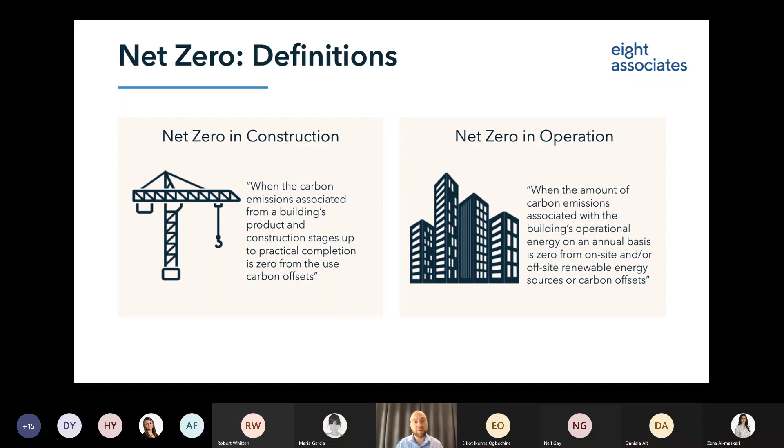So the key thing is net zero is really about the, as you would infer from the name, the net piece. The reality is that at this point in time, we can't build a zero carbon building. We can't operate a zero carbon building. So we do as much as we can—we reduce it as much as we possibly can, and then we would have to purchase something like a carbon offset, where we basically commission a planting scheme or some kind of artificial environmental restoration project, which then sequesters carbon, captures it, usually in the form of tree biomass, and then we either credit or debit that depending on the amount, and we get down to that zero where we've expelled carbon into the production and use of the materials, but then we brought it back down in theory through the planting of trees.

So it's very useful to think about what we call system boundaries. If you're used to the discipline of sustainability, everything about sustainability is about the boundary, and you can think of this as to where we draw our remit. Where do we draw the extent of our system? What are we looking at? In many respects, many of the failings of sustainability and many of the perverse incentives or poor decisions we can make in and around environment and sustainability are because we haven't drawn an appropriate boundary for the application or context.

So one example of this—I mentioned before about getting beyond just looking at carbon. Carbon's important, but it's also one piece of the sustainability puzzle. So boundary issues often exist when we have a laser-like focus on carbon and we forget things like land use change, impact on biodiversity, water consumption, pollution. In reality, we need to weigh all of these things up, and that's the purpose of having a well-defined and clear boundary, knowing what to include and what not to include effectively.

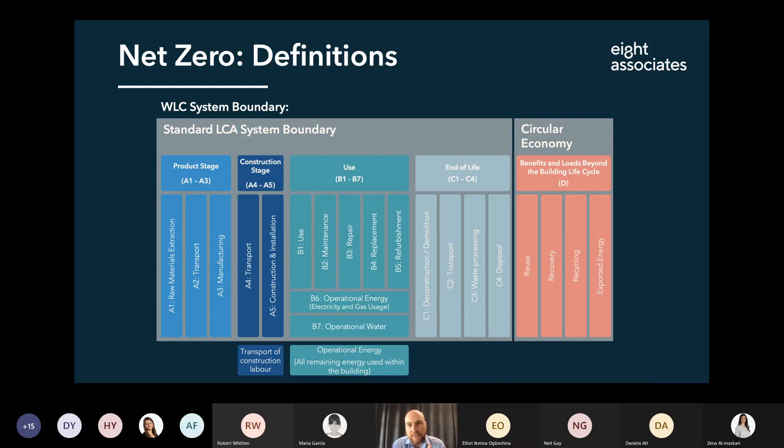It's a shame. There's a lot of LinkedIn and social media buzz and excitement about it, but in reality, this actually happens where life cycle assessment and material specification is put front and foremost in NBS specifications, at the absolute heart of architectural design. It shouldn't just be delegated to saying the client didn't really want it, or didn't express an interest, or didn't have budget. I appreciate the difficulties of being a client-led discipline, a client-led sector - that's how we do what we do - but it's our job to push this back onto the agenda and make those decisions everywhere we can, complementing the sustainability and carbon footprint of our buildings.

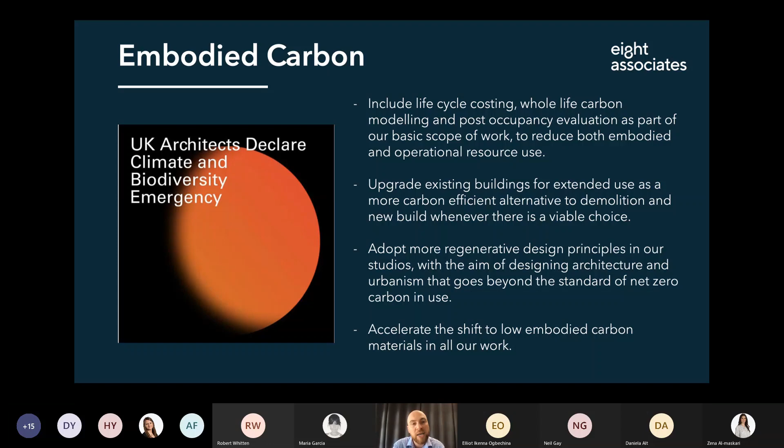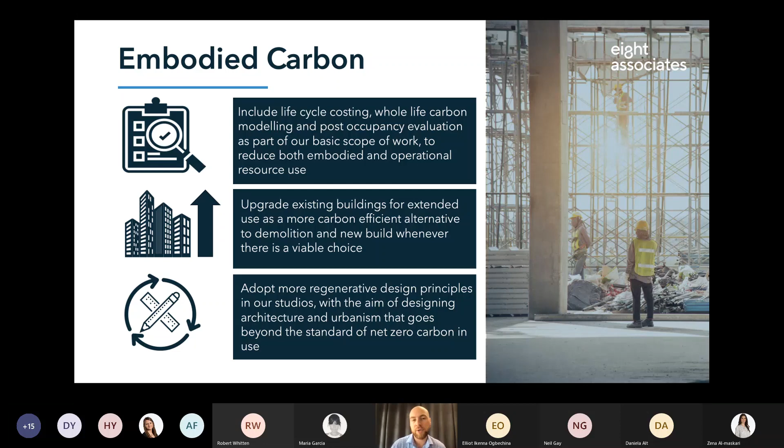So these are the key areas that relate to embodied carbon. It's pretty important that we look at whole life carbon, but we also need a lot of focus on the existing building stock, which we'll come on to shortly - this is really a key part of the challenge. New build and material specification for new build is very important, however a lot of attention needs to be focused on existing buildings, because about 80% of the building stock we have at the moment will still be in use and operating in 2050, when we're supposed to have achieved our net zero goal.

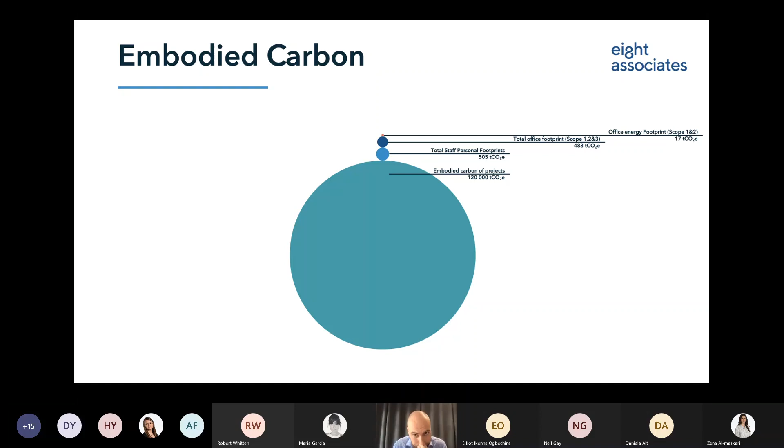So this is a very pessimistic or maybe realistic rule of thumb that we've taken from our years of working on life cycle assessment of buildings. We believe that we can usually achieve about a 13% reduction. This is taken from the few hundred projects we've worked on in life cycle assessment for the last couple of years. On average, this is the typical reduction that we were able to achieve through optimization of concrete specification, optimization of design, layout, whatever it might be. This is what we can usually achieve.

And then the key thing to recognize, I think, is what if we could do that on all of your projects through careful engagement, careful specification, careful design. The impact on the environment is orders of magnitude more than it would be if you went to become a completely carbon neutral office and completely neutralized all of the impacts of your employees.

It's not to say we shouldn't do those things. Those things are really important from the environmental perspective, because obviously many small contributions make a big contribution, and also it's really important that we spread that literacy and have that behavior change within our industry. But we've got to keep an eye on the ball, and the key thing here is the influence that we can have on our projects through minor modifications or minor enhancements can have huge benefits

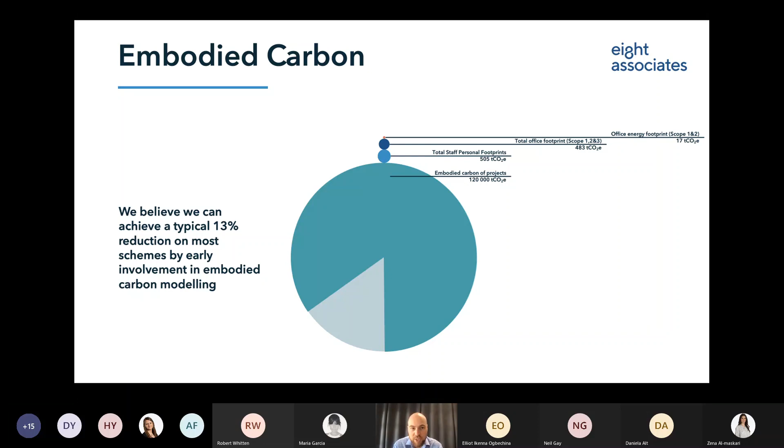when we look at the impact of buildings, because it's important to recognize that an absolutely phenomenal amount of carbon and resources is dedicated to the built environment. If you look at the construction, the maintenance, the operation, and just having an urban and built environment, it consumes somewhere between 40 and 50% of the world's resources per annum. So this is a huge amount of where our footprint lies, and it's important to recognize that small changes in a big system can have very high value benefits.

So we're going to look at two areas, which are the two areas of net zero, which is embodied, obviously, and then the operational. We've got a few slides on each, and it's probably worth digging into them, and I just want to highlight some of the trends and some of the things that I think we really should know and recognize.

So this very useful rating system or data set comes from LETI, which many of you are probably aware of. It's a really great consortium of like-minded companies that want to contribute and share data, and they've come up with this banding because a lot of the problem we have with calculating embodied carbon is many clients, many practices still don't really know what's good, what's bad, and the reality is that we have very poor data quality.

The data is very far from what we need in order to make informed and intelligent decisions. So we often end up using a lot of generic carbon factors for materials and products, which is the best we have right now, but we need to very quickly move away from that.

But this is where, once you bring together your carbon footprint for your building, you put that into the metric of kilograms of carbon equivalent. It's equivalent because it captures all of the greenhouse gases, methane, sulfur dioxide, whatever it might be, these other gases and pollutants which have an impact on the greenhouse effect. We put it all into a coefficient, or rather a CO2 factor, and then we roll it all into one. That's why it's CO2 equivalent.

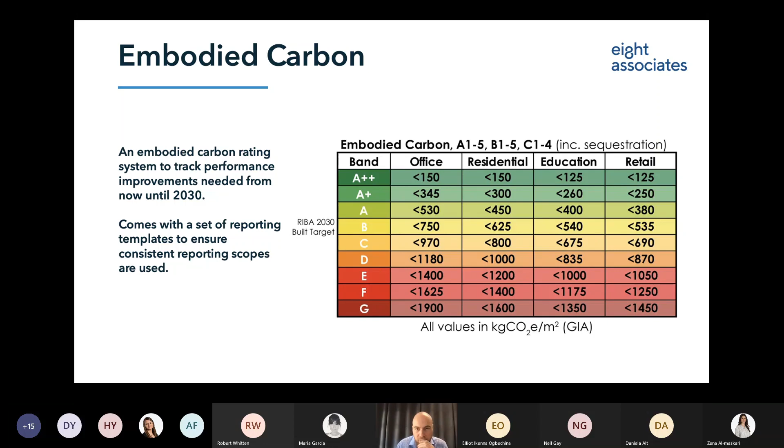So just familiarize yourself with that slide for a moment.

So embodied carbon is really important, obviously, in new build, because all these materials are being assembled. And if you look at the rough pie chart of the split between embodied and operational carbon for a low carbon or well designed building, say BREEAM Excellent and above, or Passive House, or a whole range of different high performance or low carbon buildings in operation, you'll probably find that the split between embodied carbon and operational carbon when the building goes into use is about 50-50. It depends on the use class, but it can be more either way. So that just highlights the importance of embodied carbon.

That's why we need to put this emphasis on the reuse and retrofit of existing structures, and we talk about this a lot, and we have a few headwinds against us. The VAT difference that we have between refurb and new build is not very helpful, and we know the government did that to spur on more new build, particularly new build homes. But what actually happens is it creates a bit of a disincentive. So we have many developers that come to us and say, we specifically are aiming to demolish this building so we can get a VAT benefit, which is running very much counter to our aspirations here.

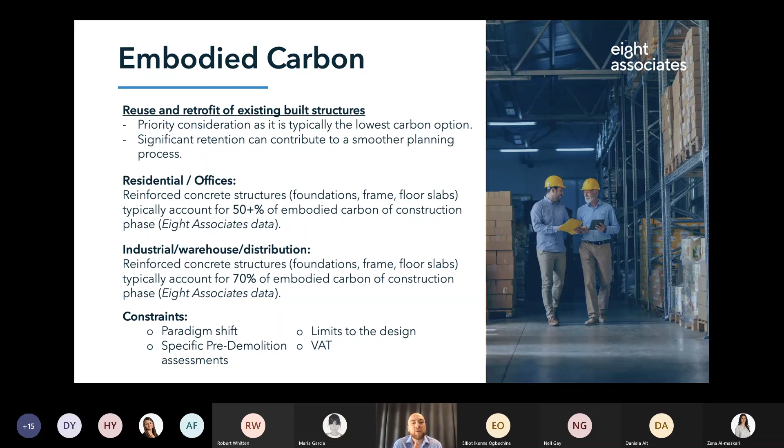However, broadly speaking, with the exception of heritage assets and listed buildings, I'm yet to see a building that can't be repurposed and reused and still achieve a comparable, all things considered, performance which is roughly in the same ballpark as a Part L compliant building. Obviously, the real constraints are turning circles, spacing, layouts, column layouts, anything like that. The real practical aspects of ergonomics where the building might fall down. But purely speaking, from an environmental, sustainability, and energy and carbon emissions perspective, reuse and retrofit is 9.9 times out of 10 better.

So this is an example, just to get a feel for this, of quite a big building in central London that we were working on, and there was basically a lot of retained but a lot of new, and we're adding stories onto this building.

You can just see here the actual benefits. So this was our baseline here if the building was new build, best practice 2020, best practice 2030, and what we actually achieved. And you can see here it's a phenomenal reduction from reusing approximately 50% of the structure and the different aspects.

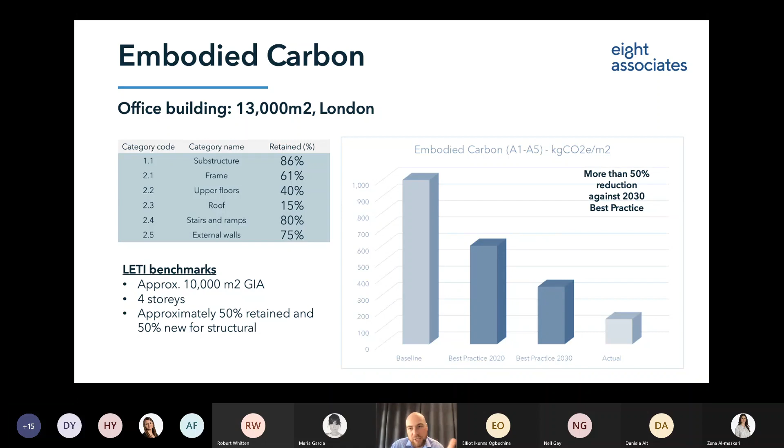We were able to maintain a hell of a lot of the frame and the external walls, which is fantastic. The roof we lost, and then upper floors needed a lot of repurposing, so we lost that. But by and large, you can see that having such a large amount of retained facade completely changes the performance, and this is why it's so important.

So I will just let you read this for a moment. You can see these are some pointers and rules of thumb for yourselves to familiarize yourselves with as to the general benefits of embodied carbon or low carbon specifications.

So the first two are really concrete, or rather cement replacement. So you can see we have GGBS and PFA, and these are basically byproducts from the industrial process, which can be added as alternatives to cement in concrete mixes, and quite substantial.

As you may remember from the previous slide, the structural frame is a huge amount of the overall embodied carbon. So this is really your first port of call: look at concrete mixes, look at structural steel, because these are where probably the biggest ticket items are going to be achieved.

You can see plasterboard, so British Gypsum, for example, are very good. Obviously, they're the industry standard really for plasterboards, but you can see they're working very hard to improve the sustainability of their products, and they have something in the form of an EPD.

So an EPD is an environmental product declaration, and this is really the gold standard of environmental declaration. So if you want to go and find what the environmental impacts are of a product, if it has an EPD, by and large, it should be pretty clear in there.

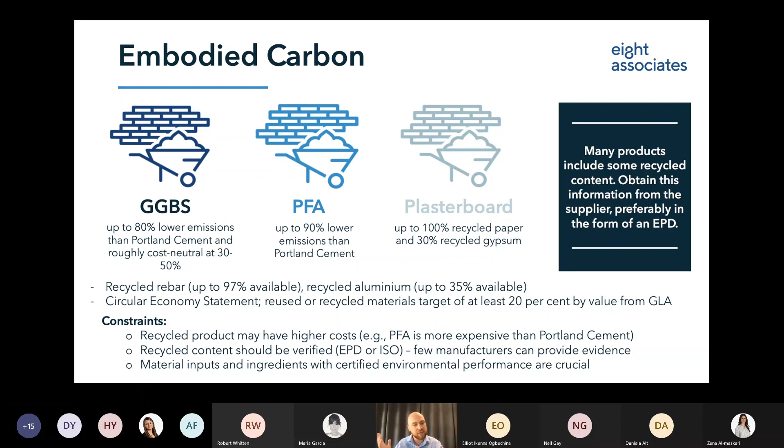So the problem is data proliferation. We do not have good data, and that's why we use a lot of generic data, and that adds a huge amount of uncertainty in our life cycle assessment studies, and that's something we'll come on to later on. So obviously some good rules of thumb here, which you as designers will all be aware of.

Something to mention on timber: we get to count timber as being negative in carbon terms, because it's obviously sequestered carbon from the atmosphere and has locked it into wood, and then we bring it into the building. Great, that's a negative.

However, how things are changing at the moment is that you've got all these forestry commissions, and all these trees are being grown in other parts of the country or other countries, and there's a real question mark as to, as we place more emphasis on carbon sequestration, does the seller and the grower of that timber want to give that carbon credit away? Do they want to keep it themselves?

Essentially, I think in the next year or two there's going to be a lot of fighting over this to work out who gets to keep that carbon credit, because obviously the grower, the supplier, the installer, the building, they can't all keep the carbon credit for their benefit, and there's going to be a bit of a battle as to who gets to count it.

So in theory, when it's sourced properly and you get to credit it, it's a great addition, but that might not be the case, and I think there's a lot of battles going on at the moment as to who's going to actually credit it.

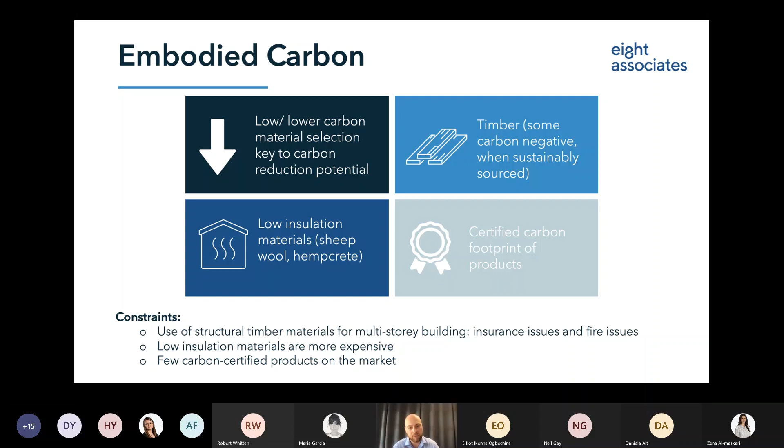One of the key things which is very important to consider, and a really important part of embodied carbon and building design, is life expectancy. The key thing here is not to just say materials that last a long time are better, because it's more nuanced and sophisticated than that. It's all about matching the anticipated life expectancy with the durability and life expectancy of the given product.

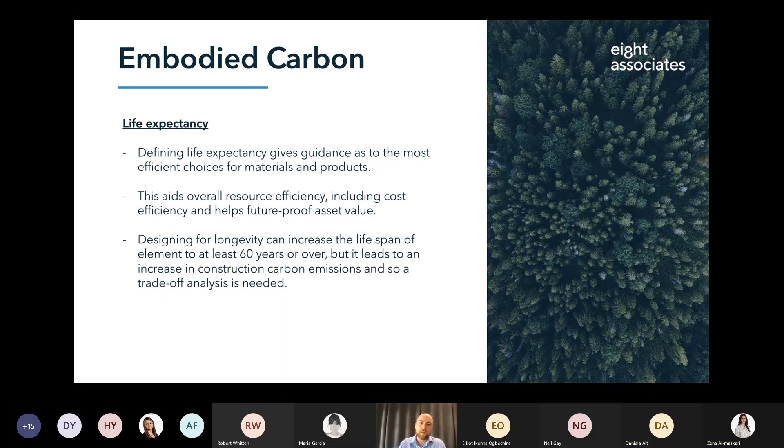For example, we have a lot of challenges with retail clients, commercial clients, but particularly retail, who will do retail fit-outs in a mall or a little outlet store somewhere. Particularly luxury brands specify incredibly high carbon, very beautiful materials—brass, marble, etc.—whatever it might be, and then it's going to get taken out in 5, 6, 7 years time because the concept changes, the aesthetic needs to change. All these materials which have a technical lifespan of 60, 100, 200 years potentially are getting ruined and not being used to their fullest effect.

So I think it's very important we look at this—take this mindset and design philosophy about layers, and work out how we specify appropriately for the component in question.

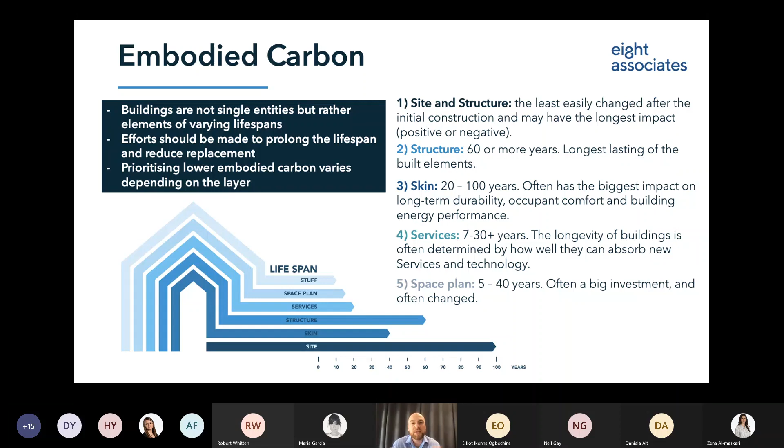Design it really to build to stand the test of time. You can think about this kind of fantastic legacy we have with, say, all the Georgian buildings of that era within our cities, these beautiful buildings that are going nowhere. We have this gift, and we have this kind of embodied carbon in materials locked in for the long term. That's an example of beautiful, well-built buildings that will stand the test of time, and we get that excellent benefit of embodied carbon over the long term.

So these are just guides, and I know we have a lot of architects, and perhaps a couple of structural people on the call, but when you're dealing with your structural colleagues, these are probably a few things to bear in mind - general rules of thumb in terms of trade-offs.

One of the key things I think trade-offs is one of the key important factors to consider when we're looking at design, because there's never that ideal option. There are always ramifications and implications of doing one course of action or another, and we need to bear that in mind. But generally, this is a typical split of what we found from our data, based on the relative environmental impacts of each of the structural components.

And the key part here is the sensitivity analysis. This is an analytical tool or method where we look at the impacts of changing specification, or adapting or augmenting a particular specification. Naturally, when something's very sensitive to change - i.e. if something changes by 5%, there's an increased environmental impact.

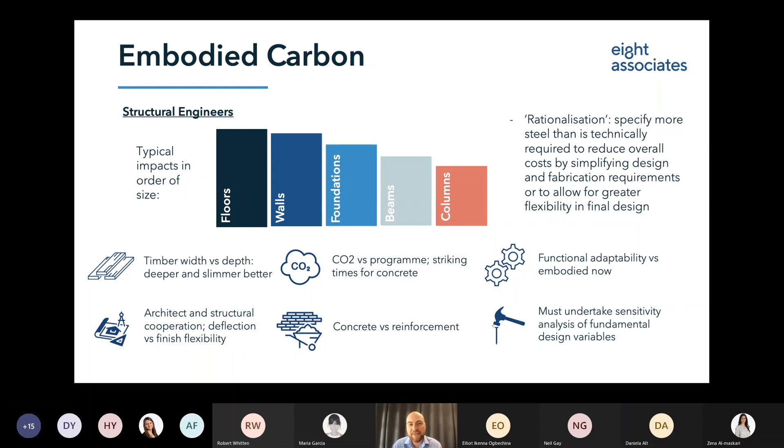Small changes create big impacts. We want to steer away from those because we know things change. We know there are variations, we know we get challenges occurring, and things aren't static all the time. If we have very sensitive design specifications, we don't want to come unstuck later on. So we should probably have a preference for less sensitive decisions and specifications.

Something to bear in mind on the structural side is that we do tend to over-engineer. Now, this is not necessarily a bad thing. We have a lot of practices, and a few engineering practices which are greatly respected and fantastic professionals. However, I've heard some of them stating that the so-called climate emergency is now, so we shouldn't be over-engineering - we need to go right up to the minimum we can get away with on structural thresholds and leave it there.

I actually completely disagree with this philosophy. I think the reality is we don't want to be ridiculously over-specifying, but the reality is that one of the key things we've learned in the last couple of years is the need for buildings to be adaptable and to repurpose. We don't know what the future is going to look like. We have no idea, and in 10, 20 years time, who knows what we'll be using these buildings for and how we will be applying them.

When we were having these functionality workshops with clients in 2019, we'd be saying, can this building change use class? And there was always a slight insinuation that it was a ridiculous proposition to be looking at this from an adaptability and functionality perspective, because the planning says it's an office use class and it will never change. Well, COVID hit, and then what happened? We have a number of developers who were in the office space, and a number of landlords who own offices now looking at changing that to some kind of residential use class, or more flexible workspace, or whatever it might be - looking at changing use classes for these buildings. And these are many of the same clients who said it was ridiculous to be looking at functional adaptability because it is what it is.

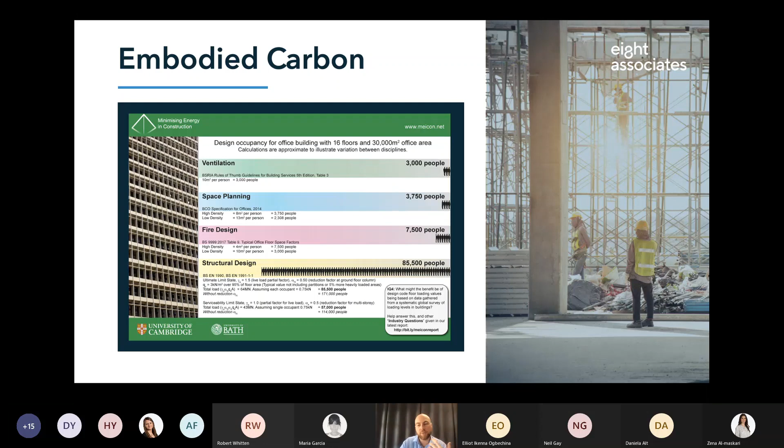For MEP engineers, some quick rules of thumb to keep in mind: it depends heavily on the use class. It can be as low as 15%, or up to 40%, of the embodied carbon of the entire building. Electrical is probably higher than mechanical, all things considered - it's probably up to half of the total MEP installation's embodied carbon comes from electrical. Refrigerant leakage is also often neglected, but is quite impactful.

One of the key things I mentioned before is environmental product declarations. We don't really have this for MEP, so we can have certificates and declarations for plasterboard and concrete blocks - inert, simple elements. But when it comes to things like lighting and air handling units, because they're very complex products, we don't have environmental data, which makes things very difficult for us. It's hard to see if an air handling unit from one company is better than another - this one might be slightly more efficient, but then slightly heavier. We're using very rough rules of thumb on this, and the sooner we get better data, the sooner we can make better decisions.

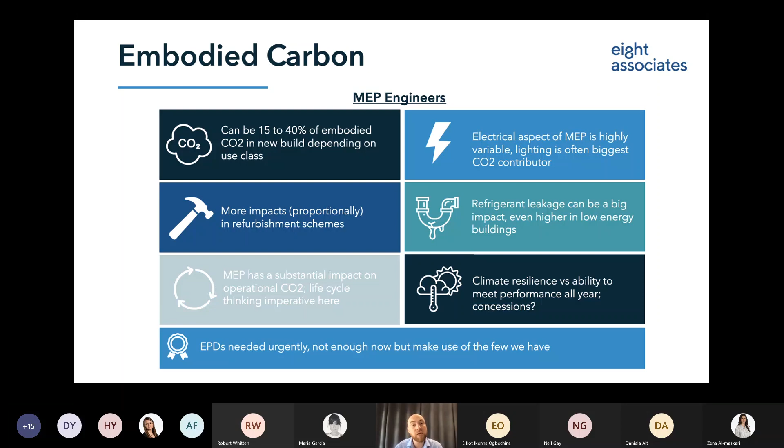So just moving on to operational carbon - I'm aware of time, so I'll move on to operational and then close with the importance of certification. This is roughly our interpretation, based on Committee on Climate Change and other data, as to where the split of carbon emissions reduction is going to be made in order to hit net zero in operation. You can see new build probably comprises 15%, something like that, of where our efforts are going to be put.

A big chunk naturally is energy efficiency. We obviously have this mantra of fabric first, which is absolutely correct, but we don't want it to become fabric only, because we've got limited funds, limited capex to deploy when looking at sustainability strategies, construction and refurbs. It's important to recognise that a lot of existing building energy and carbon reductions are going to have to come from the energy system as well - it's not just about designing down to zero energy demand buildings. We need to look at where we can spend our money. The key thing is, if we have a low performing thermal envelope and fabric, that creates a whole lot of problems which manifest in the MEP specification. So it's really important we get that fabric right first.

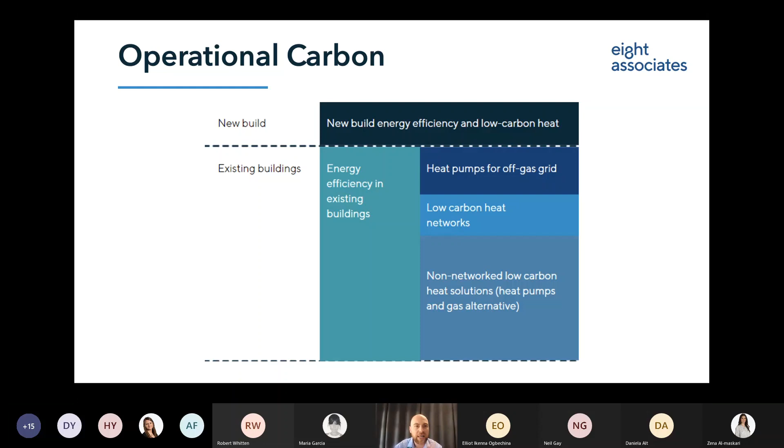But it's worth bearing in mind that for our existing buildings, a lot of it is going to be heat pump led, potentially low carbon networks. We might be looking at moving to a hydrogen based fuel source as opposed to gas in 20 years time - to be honest, we don't know. This all depends on government, huge infrastructure plans and so on. But the key thing is to get energy efficiency down, and enable adaptability for electrification. Can heat pumps be incorporated into our existing buildings? That's going to be a key metric for adaptability and the ability for our existing buildings to become zero or low carbon in operation.

So we have this kind of trajectory of tightening of the regs over time, and you can probably expect a similar thing to be happening over the embodied carbon. And this is something that was just mentioned, the fabric first trade-off. It's quite important that we just bear this in mind. So this is kind of retrofits of maybe hard to heat properties, and hard to treat properties rather.

So you can see kind of the cost trade-off there. Roughly a heat pump installation and external wall insulation on a single dwelling is about the same cost, but in reality what would save more carbon would actually be the heat pump. So this is just something to bear in mind. We have, as I said, fabric first is absolutely right, but it can't be fabric only.

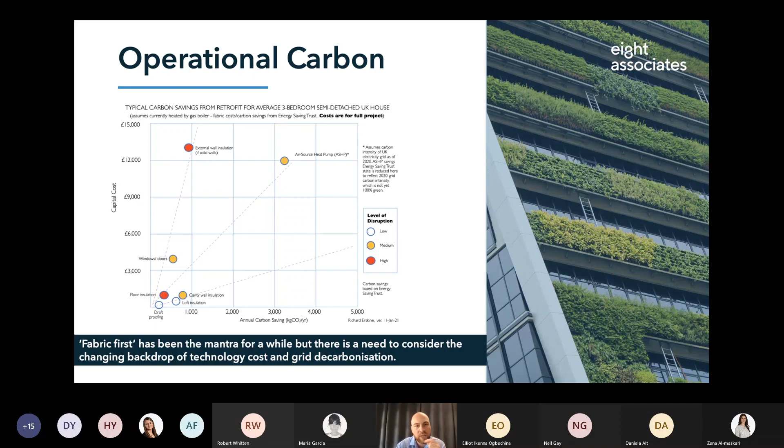And if we find trade-offs between kind of potential, we know that we get a lot of bang for our buck if we treat a solid wall and we insulate it, we get a huge reduction, which is great. But those kind of more marginal thermal upgrades, we want to be looking at that and thinking, is that the best place to spend our money? What if we were to flip from a gas boiler to a heat pump on this scheme and what have you? So we need to be thinking of where we have the best kind of influence and the best kind of carbon impact based on the context of the dwelling or the building in question.

And this is obviously quite a lot of text here, but this is just really showing, I suppose, the kind of the cost curve. And then the key thing to point out, if you look on the left here, you can see this graph, that cost curve is increasing. And that's the key thing to mention. As we know, the kind of cost of reductions doesn't go up linearly. It's kind of an exponential curve, and at some point we reach a limit.

And if we're looking at this from the big picture level, and we had, say, the government's going to come up with some kind of budget for treating properties, and it might be 250 billion. That's maybe a bit more depending on who's recommending it. That's the kind of scale of the retrofit ambition and the scale of the money that's planning to be spent on, one way or another. We probably want to think we want to spread that in the right areas.

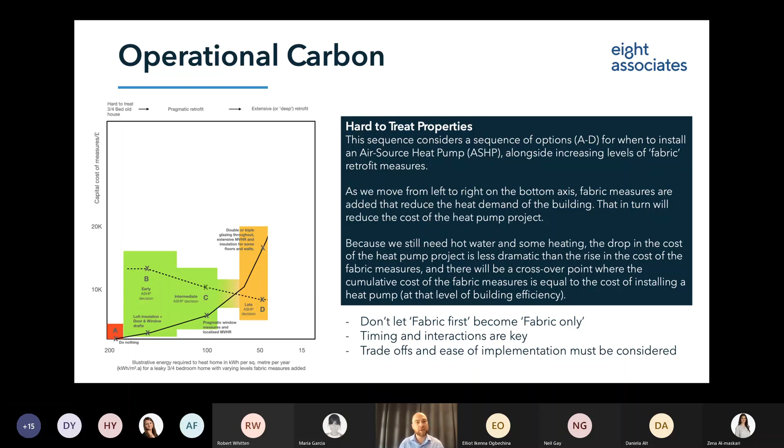We don't want to take a small sliver of buildings to the highest possible performance that they possibly can and neglect others. That money needs to be spread evenly and fairly and appropriately across the entire stock. And obviously, if we have non-linear cost curves, we need to think about where we want to sit on that curve. This is more, I'm not saying there's one right answer here or not. This is probably more food for thought.

So finally, we talked about embodied and operational carbon. One of the key issues we have with net zero, life cycle assessment, and footprinting of buildings is really, is the data correct? Are the calculations correct? And we have lots of people saying different things. We get wildly different results. So one of the key things that we need to recognise is the importance of verification.

So we looked on the marketplace and we couldn't find anywhere or anything that was delivering anything like this. UK GBC were talking about setting up a net zero building certification. They went out to consultation, or they kind of posed it as a question. They haven't really moved that forward as far as we can tell. So we kind of took it upon ourselves to put a bit of a line in the sand and say, this is what we consider to be the appropriate level of verification certification.

So as of next month, we'll be having a hard launch of our verification standard. But the key thing that we need to consider here when we're looking at net zero certification for buildings is the measurement needs to be complete. It needs to take into account practically everything we can within reason. It needs to be verified, so a third party needs to review it to check that the data is correct, the calculations are correct, and the key thing is it needs to be accessible.

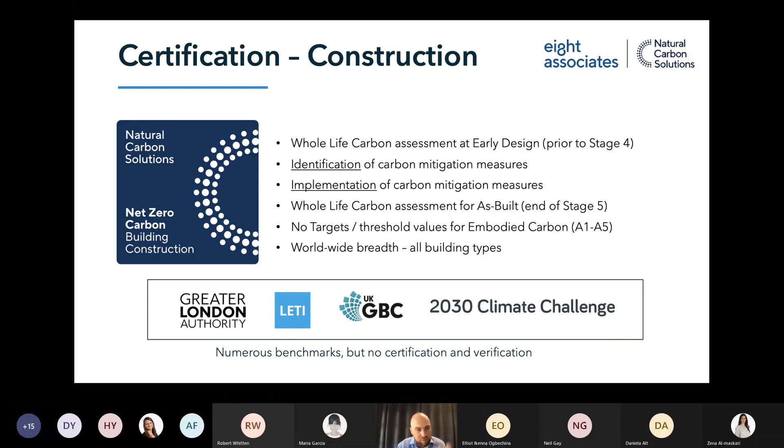And we have a similar model for operation. Obviously we do an energy assessment at stage 2, and we do our SBEM modelling, but when our building goes into operation, it needs to be based on real data, not hypothetical model data - that's the key thing there.

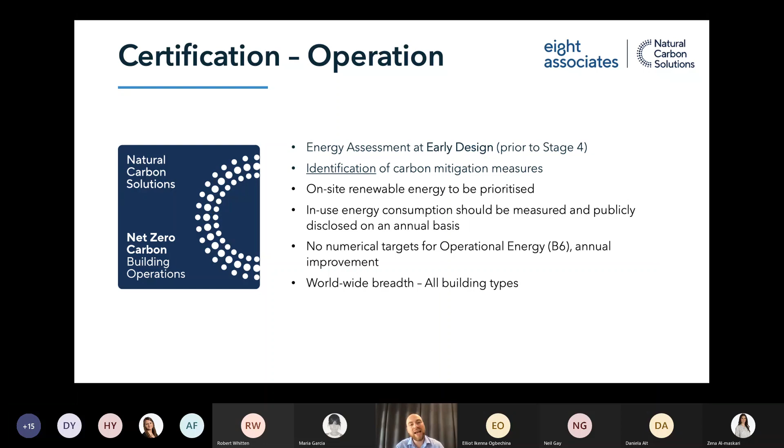So it's basically based on meter readings, real energy consumption, and we need to prove that the amount of offsets being purchased actually means that we're netting off and getting down to that magical net zero target.

And naturally, you want to start off the process - we need to reduce first, we measure, then we reduce, then we look for net zero, and eventually we might even go climate positive, which is where we're putting back more than we're taking. That would be the dream scenario for decades ahead, but it's worth having that end point in mind. The key thing is, first and foremost, to measure and then look at reducing, because you can't manage what you don't measure. We need to get that measurement right, and then we can move forward.

So yeah, that more or less closes the presentation. I hope you found it useful as to a bit about embodied carbon and operational carbon and the importance of certification and verification.